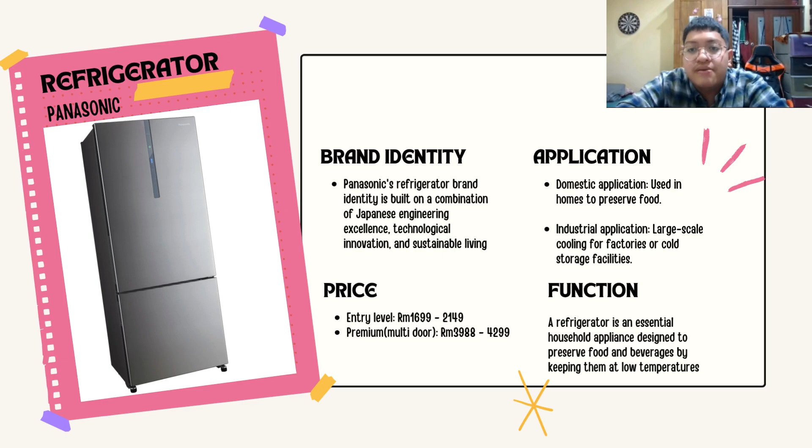Thank you. I'm going to talk about mechanism. Working principle. Compressor. The compressor compresses the low pressure, low temperature refrigerant gas, usually R600A, into a higher pressure and higher temperature gas. This increases the energy of the refrigerant and sends it to the condenser.

Condensation. The high pressure hot gas passes through the condenser coil located at the back or the bottom of the fridge. As it cools down, the refrigerant releases heat to the surroundings and condenses into a high pressure liquid. 3. Expansion. The high pressure liquid refrigerant passes through capillary tubes or an expansion valve which reduce the pressure. As the pressure drops, the refrigerant becomes a cold, low pressure liquid.

4. Evaporation. The cold refrigerant enters the evaporator coil located inside the fridge. Here it absorbs heat from the items stored inside the refrigerator, evaporating back into a gas. This cooling effect lowers the temperature inside the fridge. The low pressure gas returns to the compressor and the cycle continues.

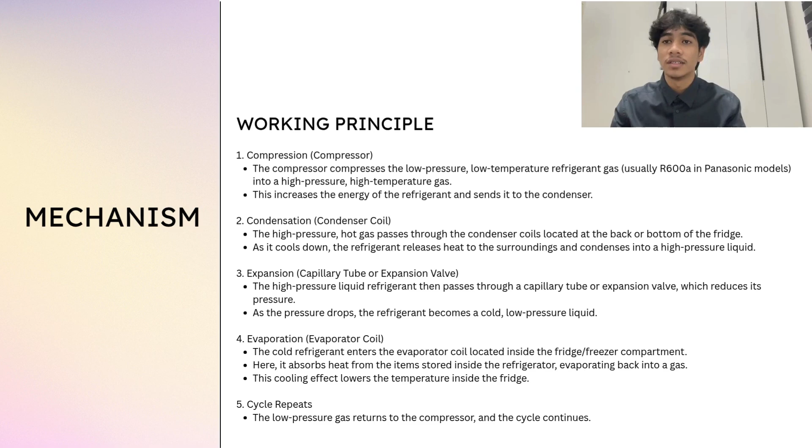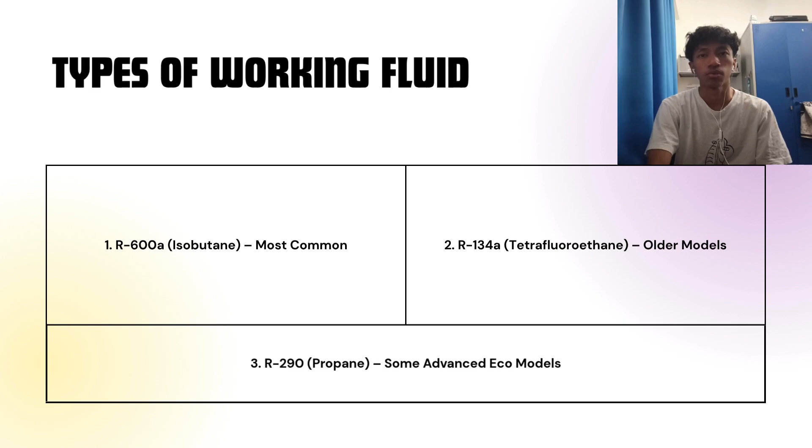Okay, now let's move on to types of working fluid. First, we have R600A or isobutane. It's the most common refrigerant used in modern fridges. It's energy efficient and better for the environment. Second, we have R134A. This one is found in older models, but it's less eco-friendly, so that's why it's being used less today. Then lastly, we have R290 or propane. This fluid is very efficient and good for the environment, but it needs to be handled safely because it's flammable.

Momentum flow theory. The force exerted by the refrigerant flow can be described by F = ṁ(V out − V in). F: reaction force on the component. ṁ: mass flow rate of refrigerant. V in and V out: inlet and outlet velocity of the refrigerant.

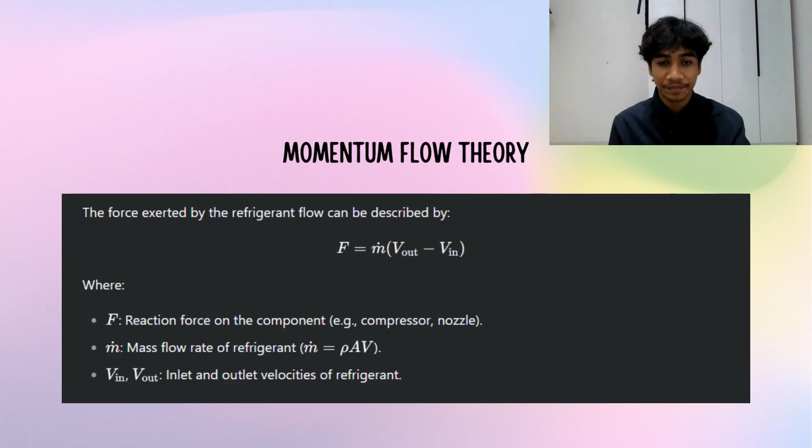Right now, I will present about Bernoulli principle and Reynolds number in refrigerator systems. So first, Bernoulli principle helps us understand how pressure changes with velocity in a flowing fluid. So, the equation you see here shows the relation between pressure and velocity. So we apply it using R134A refrigerant in vapor phase, with a density of approximately 20 kilograms per cubic meter.

In this example, the inlet velocity is 2 meters per second. The outlet velocity is 20 meters per second. So this is just an example, okay? So using the equation, we calculate the pressure drop: 0.5 times 20 times (20² − 2²) equals 3,960 Pascal, about 3.96 kilopascal. This shows a significant pressure drop due to increased velocity, which is common in components like the expansion valve or compressor.

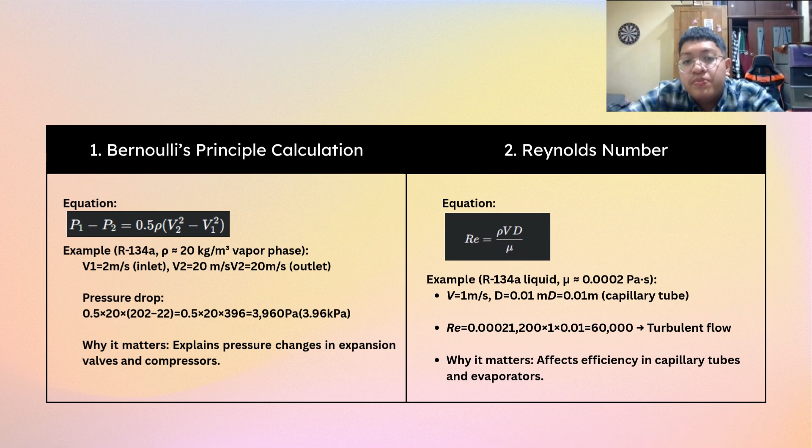So for my mistake, when I say the formula for Reynolds number is Re equals ρVD over viscosity, equals 1200 times 1 times 0.01 over 0.002, equals 6000. That's the only thing I want to edit, and thank you.

Thanks to Adam. Now let's move on to the Mach number. The Mach number is the ratio of the local flow velocity V to the speed of sound, which is c. In a refrigerator, the airflow is usually quite slow, around 5 meters per second, while the speed of sound is about 343 meters per second. So when we calculate the Mach number, we get a very small value, which is 0.0146. This shows that in a refrigerator, compressibility and high-speed flow effects are negligible. That's why the Mach number is not important in refrigerator design or analysis.

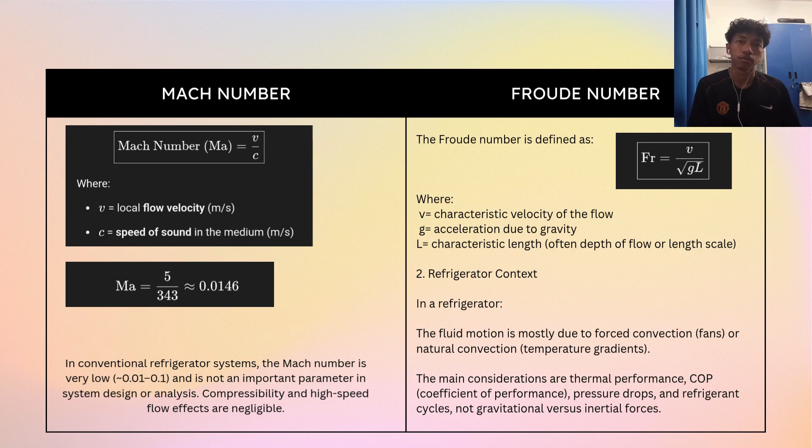Now let's move on to the Froude number. It is defined as the flow velocity divided by the square root of gravity times length. This number is more relevant in systems where gravity affects flow significantly, like open channels or free surface flow. But in a refrigerator, the flow motion is driven mainly by forced convection, using fans, or natural convection due to temperature differences. So again, the Froude number isn't a key parameter either. Instead, what really matters in refrigerator systems are things like thermal performance, pressure drops, refrigerant cycles, and the coefficient of performance.

Thank you, Firdaus, for the explanation about Mach number and Froude number. Now I will explain about encountered problems. First, we have cooling issues. This occurs when the fridge is not cooling enough or is unable to freeze food. Some typical causes include dirty condenser coils, which reduce heat dissipation, a faulty evaporator fan that blocks the circulation of cool air, and low refrigerant charge, usually due to leaks or improper charging. The recommended fix for this problem is to clean the coils, check the fans, or if needed, call a technician to check the refrigerant leaks.

Next is excessive frost buildup in the freezer, especially on the evaporator coils. This may be due to defrost heater failure in auto defrost models, a faulty defrost thermostat or timer, or a door left open or one with a bad gasket which allows humid air inside. The solution here involves replacing the heater or thermostat and checking the door gasket for proper sealing.

The third issue is water leakage, where puddles form inside or under the refrigerator. This is often caused by a clogged defrost drain blocked by ice, a cracked water supply line for the ice maker, or a misaligned drip tray. Fixing this involves clearing the drain with warm water and inspecting the water supply lines and drip tray.

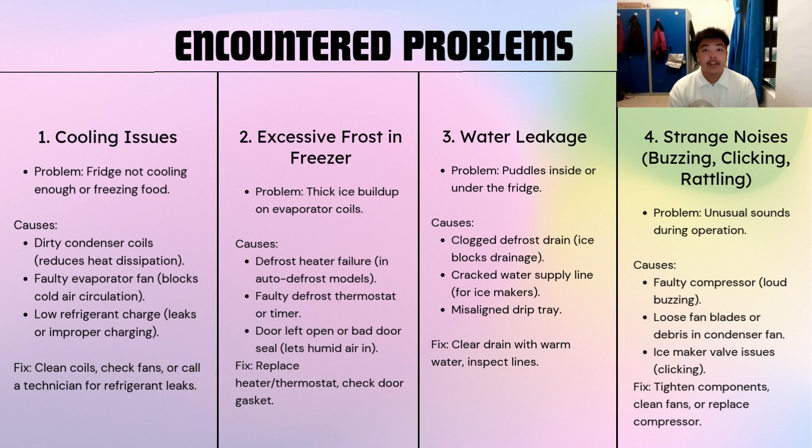Lastly, we often hear strange noises like buzzing, clicking, or rattling. These sounds can come from a faulty compressor, which causes loud buzzing, loose fan blades or debris in the condenser fan, or ice maker valve issues, which can cause clicking noises. To resolve this, we can tighten loose components, clean out the fans, or replace the compressor if needed. Next, I will pass the presentation to my friend Ashraf.

And I'm also going to talk about suggestions for improvement of the Panasonic refrigerator. The first one is improvement of the thermal efficiency, where we're going to use better insulation, such as upgrading to vacuum insulated panels to reduce heat gain through walls. For the second one, we talk about enhanced energy efficiency, such as an inverter compressor. If possible, replace the fixed speed compressor with an inverter compressor to save energy and reduce cycling losses.

The third one, we're going to use optimized air circulation for the multi-airflow design. For that, we can add or reposition internal circulation fans to improve temperature uniformity and prevent hotspots or freezing zones. And the last one, improve refrigeration cycle efficiency, such as optimized heat exchangers: use micro channel or enhanced fin tube designs for evaporators and condensers to improve heat transfer.

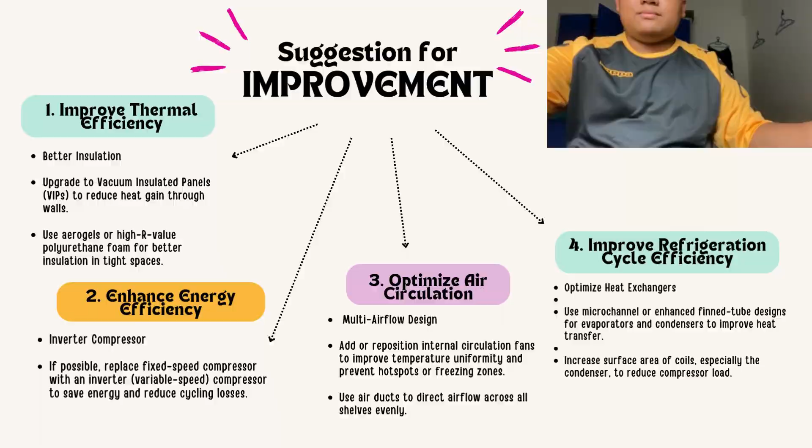To wrap our discussion, let's look at the bigger picture behind how a refrigerator works. While refrigerators primarily operate based on thermodynamics, where heat is moved from inside the fridge to the outside, there's another important concept at play: momentum flow. As the refrigerant moves through components like the compressor, coils, and capillary tube, its speed and pressure change. These changes directly affect how smoothly and efficiently the refrigerant flows through the system.

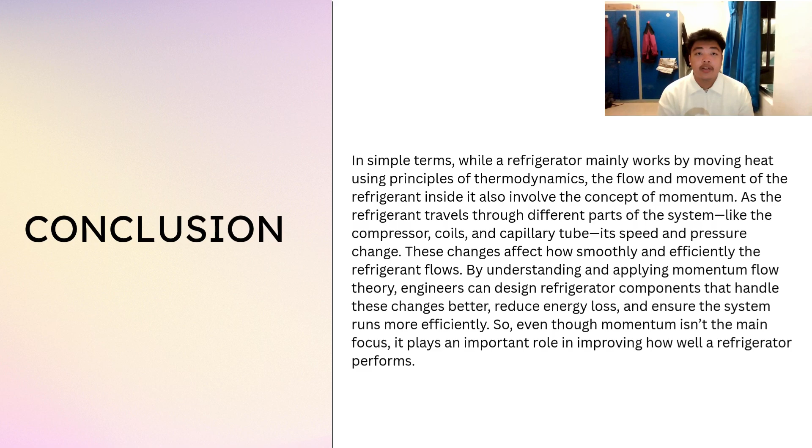By applying momentum flow theory, engineers can design better refrigerator components, ones that reduce energy losses, improve refrigerant movement, and help the system run more efficiently overall. So, even though momentum isn't the main principle behind refrigeration, it still plays a significant role in enhancing the refrigerator's overall performance and energy efficiency.